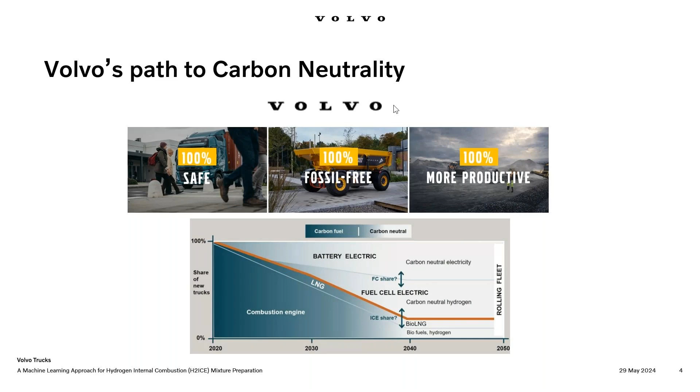So the big question, why ML in simulation? As I said, we have to be competitive considering the lead time to market. Now we are talking about new technologies, not just hydrogen. We are talking about ammonia. We talk about methanol. So this combustion is new, though the engine is the same. The combustion is new in all these fuels.

And with new technology, this poses a challenge as the unknowns are more. So in order to have a better understanding, we need to auto-generate as many designs as possible. And of course, our intention is not to replace simulations, but rather to have optimization design in product development just by replacing the redesign or the iteration aspect. That's the whole idea of doing such an activity.

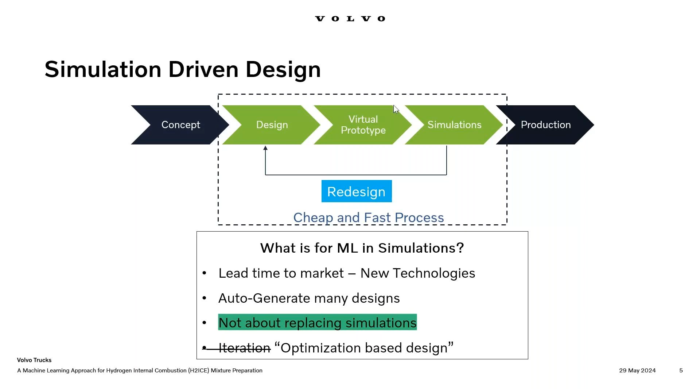Now coming to the objectives. First, we need to validate the engine image data in the form of velocity, that is PIV, and H2 mole fraction, that is in the form of PLIF, using simulations. The next aspect would be we need to identify what are the parameters that affect the mixing.

Considering the dispersion and diffusion of hydrogen in the picture, we need to come up with computationally efficient simulations without compromising much on accuracy. I know those two terms will not go hand in hand, but that is something which we are trying to address here. And finally, we need to find out how machine learning can be used to maximize the mixing.

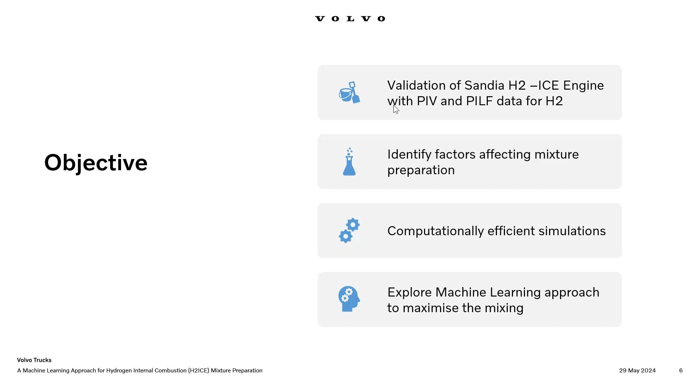So let's talk about the baseline validation. So we are considering the Sandia H2ICE engine data, which is published in the Sandia website. And this is of course a no combustion case that operates at 1500 RPM, roughly about 0.5 liter capacity. And this is the experimental arrangement on the right side where you can see a tumble plate to enhance the tumbling motion within the cylinder.

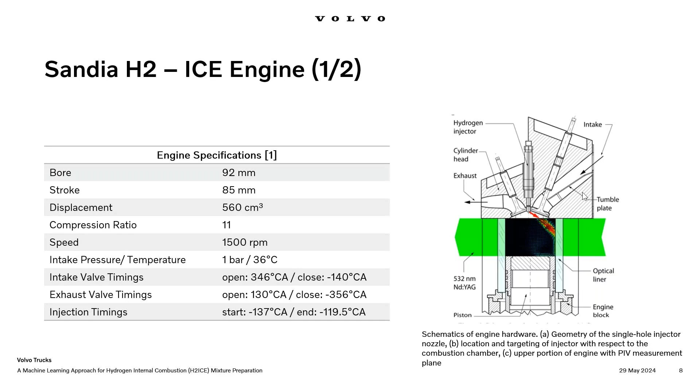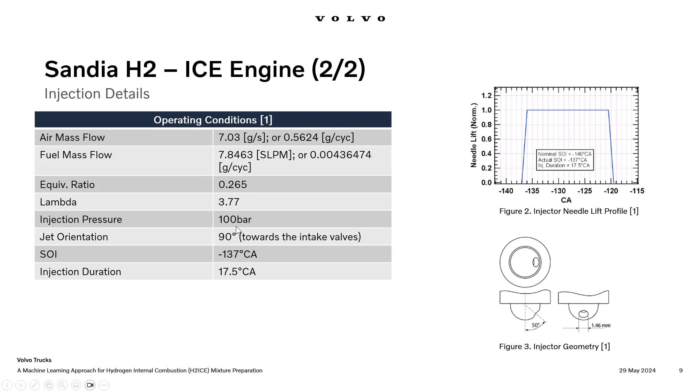And finally, at the bottom, you can see the injector geometry used for this present study. There is one interesting parameter we need to consider here. The injection pressure for this DI system is roughly about 100 bar.

So we have used the CAD information available in the Sandia website. And this study, what we are showcasing today, will consider a case with injection and tumble plate. The reason why I mentioned this is because there are many other cases published in the website. So we are only considering the extreme scenario where we consider tumble plate and injection.

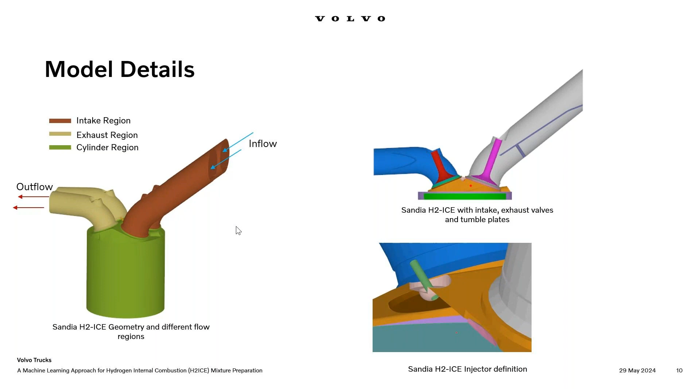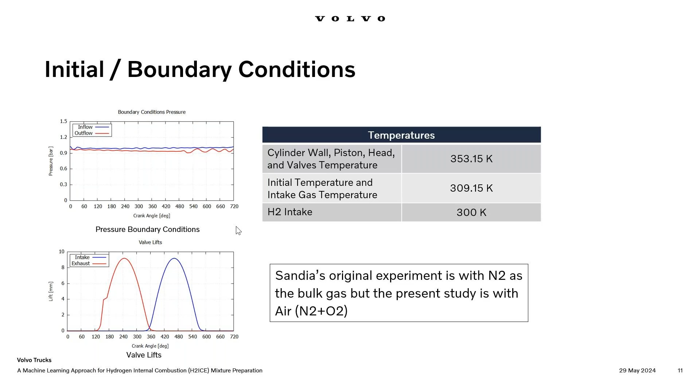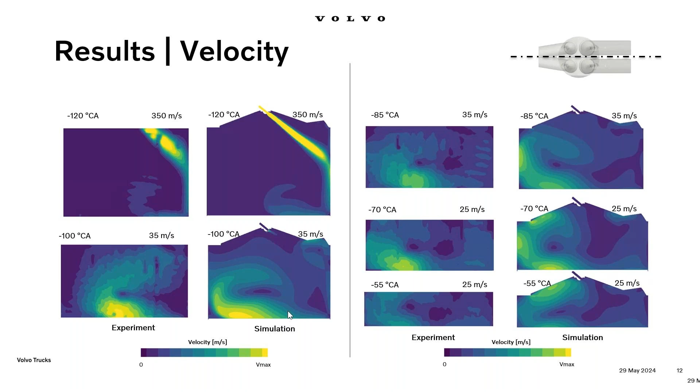We can see good agreement in jet penetration even after strong wall interactions. But as the crank angle progresses, you can see differences between experiments and simulation. And here again, we believe that the differences are due to the measurement uncertainties.

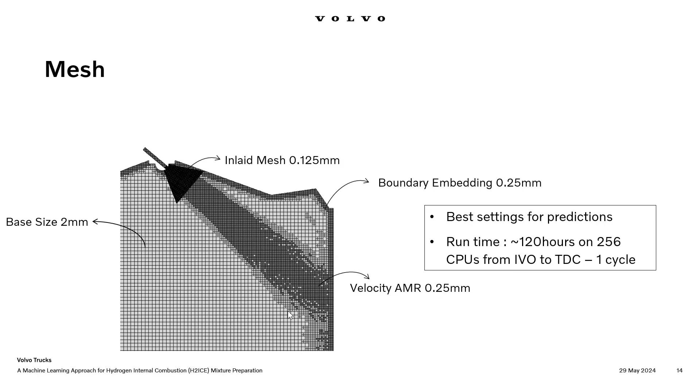But the downside here is it roughly takes about 120 hours to complete a simulation from intake valve opening to top dead center, not even combustion. And if you are talking about doing optimization on this particular case, it won't be computationally feasible. So we came up with another clever idea by coarsening the mesh.

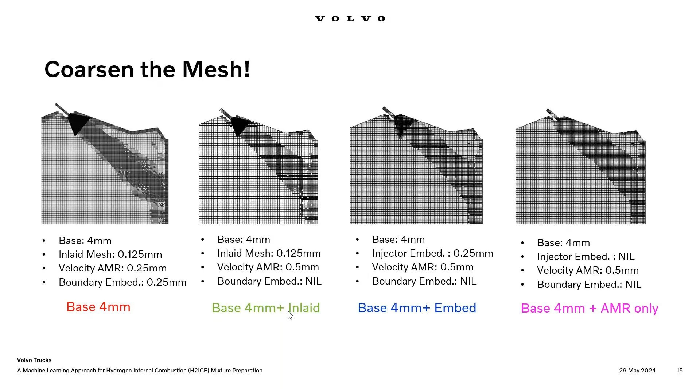So as we move from left to right, the mesh has been considerably coarsened. And we expect some numerical diffusion considering the fact that we are coarsening the mesh, but we also wanted to see how it is going to affect the bulk flow properties.

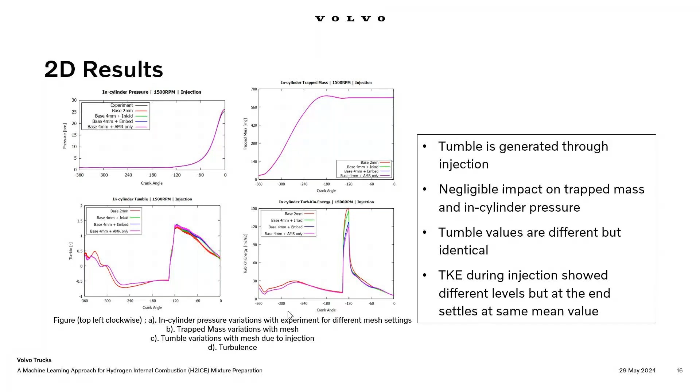On the other side, one interesting finding here, which is now apparent for all gaseous injection systems, is that the bulk flow after the injection is controlled by the injection parameters. So essentially what it means is that the tumble is generated through injection, which is an important finding when we were doing this work.

With that in mind, what we have done here is compare how our results vary if I am using the finest settings versus the coarser settings. And it's apparent that we are losing the details here, but considering the benefit we are getting with respect to runtime, roughly about 20 times, we decided to go with the base 4mm with AMR only settings.

So no inlaid mesh, no boundary embedding, anything. We are just going to resolve the flow using base 4mm and AMR.

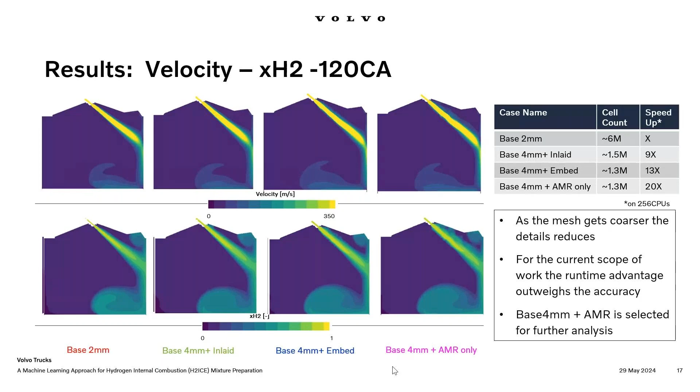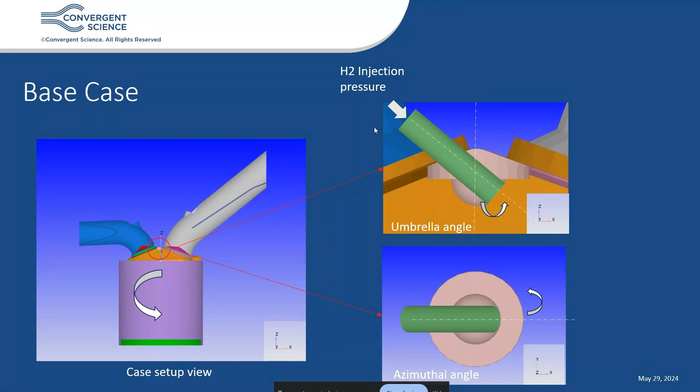So going to the next slide, for my design of experiments, I will be having three variables: the azimuthal angle, which we will be varying from 0 to 270, umbrella angle, this angle, which we will be varying from 25 degrees to 60, and the injection pressure. Like here, the H2 will be injected at different pressure, and the range will be between 20 to 80 bar. So if you see, I have three input variables, and all three input variables have their respective ranges.

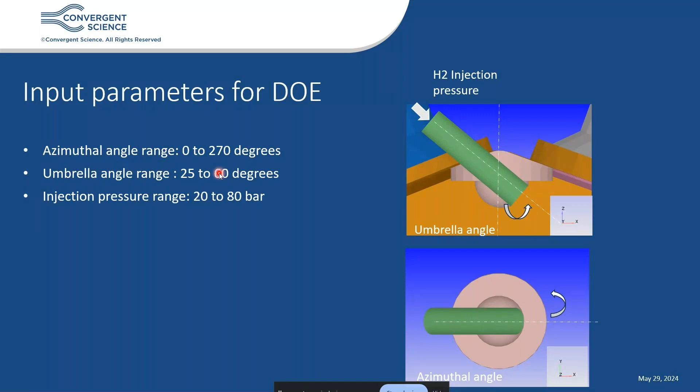Second is max tumble y. Now the y-axis is perpendicular to the screen. So if you see, currently the tumble is like this, and as Alan has explained in the validation, when hydrogen is injected, it itself creates a tumble, which kind of dominates the tumble created by the air. And turbulent kinetic energy at TDC, when the piston reaches TDC; generally our spark is either at TDC or at some inclined angle before TDC. So we will be measuring these three parameters as outputs for my design of experiments, which will be fed to my AI/ML model.

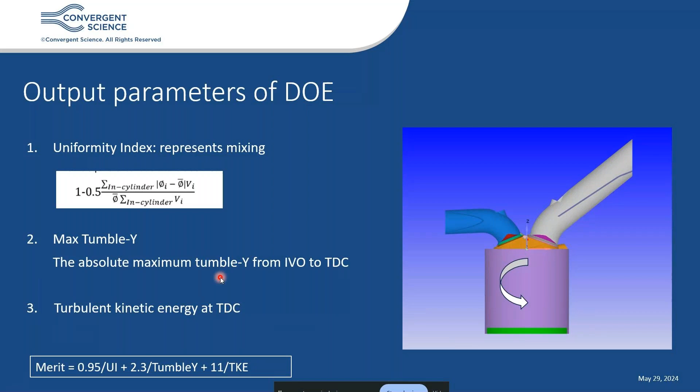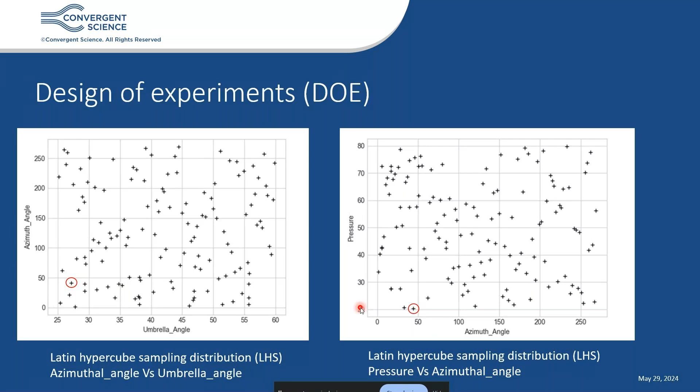So to give you one precise example, if you see this red circle, you can see here that umbrella angle is between 25 to 30, azimuthal angle is near to 50, and pressure is close to 20. And to be precise, the same point I'm representing by this case setup where we actually change our geometry by choosing the three variables. As I said, umbrella angle is 27. Azimuthal angle is 48. So if you see in the top view, with respect to the horizontal axis as well, the injector direction has changed. And in this particular case, I am injecting the hydrogen at 21 bar.

So summarizing it again, input variables are three: umbrella angle, azimuthal angle, and injection pressure. Output variables are also three: uniformity index, tumble y, and TKE. And we have a DOE of cases spread across the range of input variables, and we're going to measure these three values.

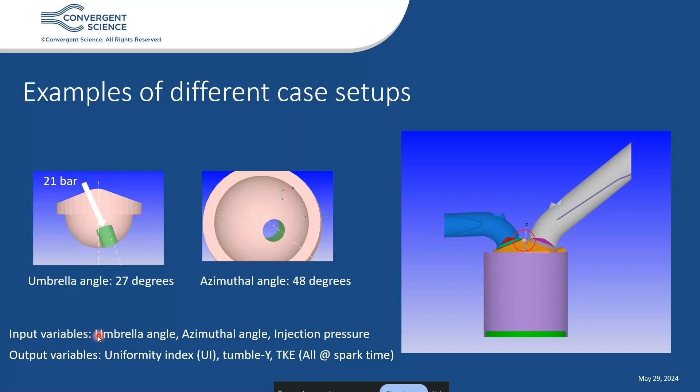So our entire DOE, which consists of 132 cases, which I just explained on the previous slides, we ran all of these cases on the Converge Horizon platform. What exactly is that? We partnered with Oracle Cloud Infrastructure to create a flexible, affordable cloud platform for Converge users, and you can run a number of simulations here in parallel in a very fast and secure environment. So if you're a Converge user, you can bring your own license and run it on our cloud, or even directly on Horizon if you can host a Converge license.

So in this particular project, the design of experiments consists of 132 simulations, and as Alan mentioned, one simulation takes approximately 6 hours. Now, all simulations can be run in parallel on Horizon. So theoretically, the entire DOE can be completed in 6 hours. Here I would like to reiterate the power of cloud computing, that all 132 simulations theoretically can be completed in 6 hours. But in our particular case, we completed it in 5 days because we wanted to consciously monitor our results in between.

Okay. So this is the important benefit of AI/ML models over the other optimizers where sequential simulations are required. For example, now I am going to generate the results of my 132 simulations in, let's say, 1 day, or, considering the practical limitations, in 3 to 4 days. And in 3 to 4 days, I can give all this data to the AI/ML model.

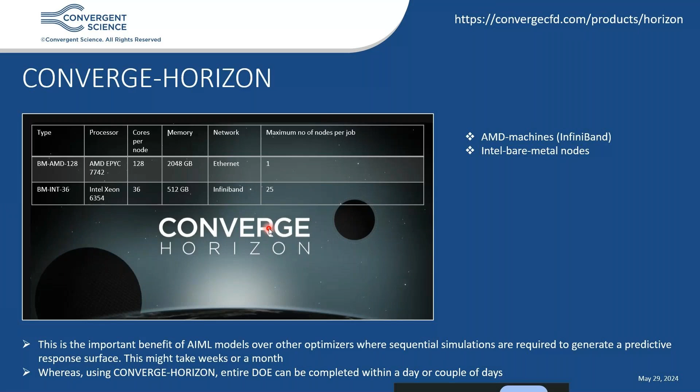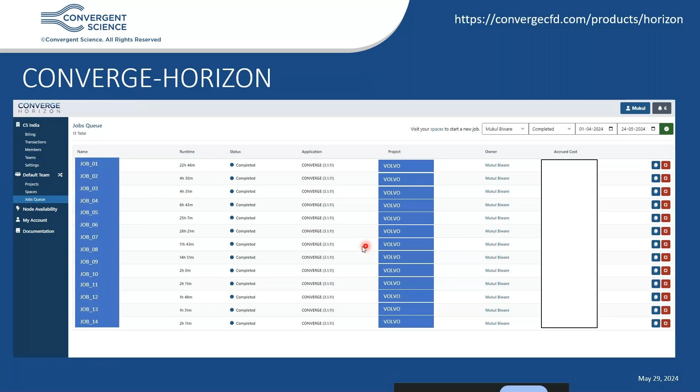Now this is just a sample screenshot. For this particular case, we ran multiple simulations. I'm just showing 14 here for now. We ran all these simulations in parallel. You can see runtime, monitor simulations, and see the cost, how much it is costing. You can see it on the fly.

Now, all this data that we generate so quickly in a couple of days, we feed it to the machine learning model. And this will be the next part of our webinar, and I would request Dan Probst to take over after this. All right, thanks, Mukul.

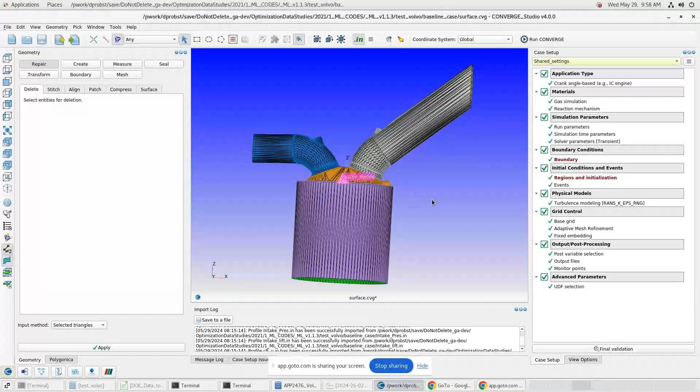So now for the next part of the webinar this morning, I'm just going to show a preview of this machine learning tool in CONVERGE Studio that we've been developing. For the work last year that was in the paper, we used some standalone tools, but now we've been working on implementing this into Studio. Right now I have our baseline case opened, and this is the same engine geometry that Alen has shown.

Now what we're going to do is open this tool to create this workflow for the machine learning optimization. We start in the first panel to generate cases. In this panel, we can create the variables that we're going to vary in our DOE. In this case, we had pressure, azimuth angle, and umbrella angle.

In this case, these parameters are not directly parameters in the CONVERGE case setup. If we were trying to vary a parameter that was directly in the CONVERGE setup, we could use a variable from this predefined list, which actually goes into the case setup. But for this case, as we described earlier, we're using these three variables that, through a Studio script, set up each case.

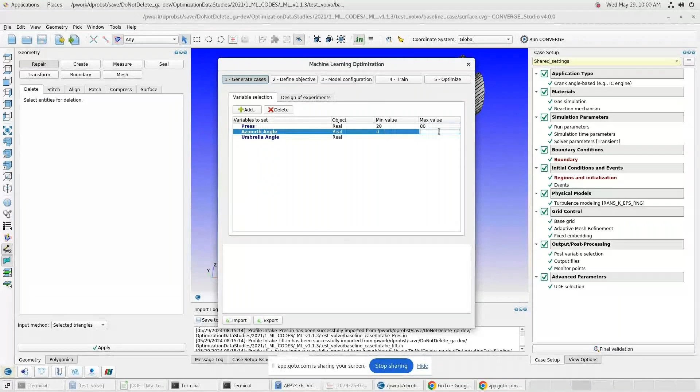Now for these parameters, the pressure, I'm going to put in the min and the max that we decided to vary in the DOE. Then move over to the design of experiments. You can pick a number of runs and then generate cases here. This uses a Latin hypercube strategy to sample your design space between the min and the max for the variables that you've specified.

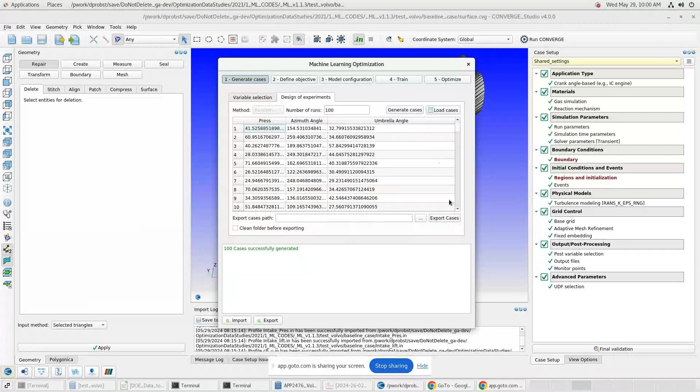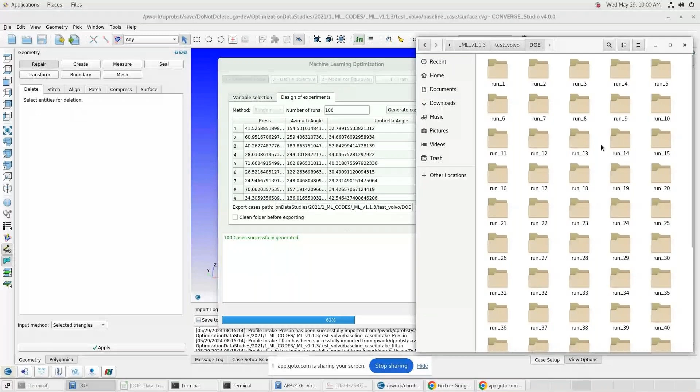Once this DOE is created, you can select a directory and export all of these cases. What you're seeing now is the run folder being created for every one of these cases with the different values of our parameters. If these were in the case setup, they would be directly changed in each folder. In this setup, we're actually using the Studio scripting. This takes a minute just to write the files.

But once all the folders are created, these could be zipped up and put onto Horizon to run them, or they could be run with a script locally.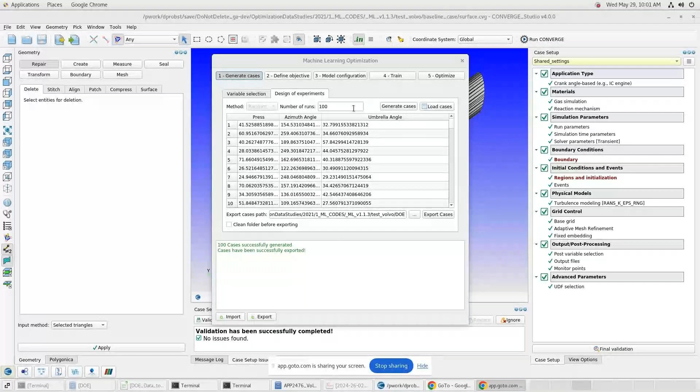So at this point in the workflow, you would pause, run all the cases, and then we come back and collect the results.

Now in the case of this study today, we actually already have a DOE that we generated. So we're going to copy and paste this DOE in, because it's really important that you have the same DOE for your input features as your results.

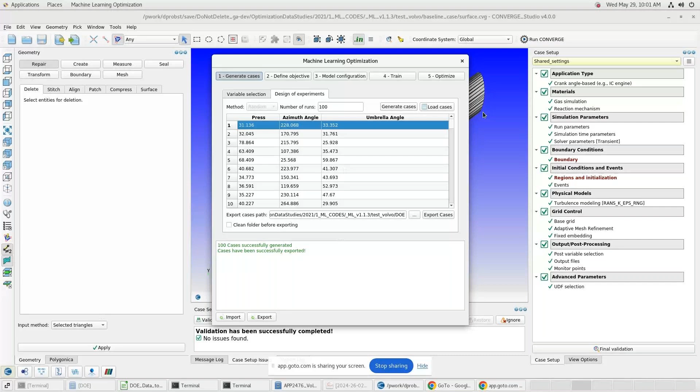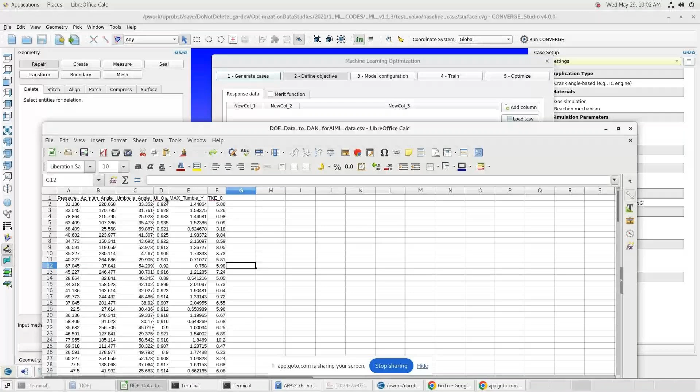So now we've loaded that DOE, and we move on to the next step, which is to bring in our variables, which we're here calling our responses. These are our results. And as Alen and Mukul described, we have three variables: a uniformity index, the max tumble, and TKE at TDC. So we're just going to rename these quickly to the variable names.

And then we can load in our results. In this case, I'm just going to copy and paste them in. And getting these results from Converge is pretty straightforward. Sometimes we'll write a UDF to calculate some variables that are written at the end of the run. In this case, these could be grabbed from the standard .out files pretty easily using some scripting.

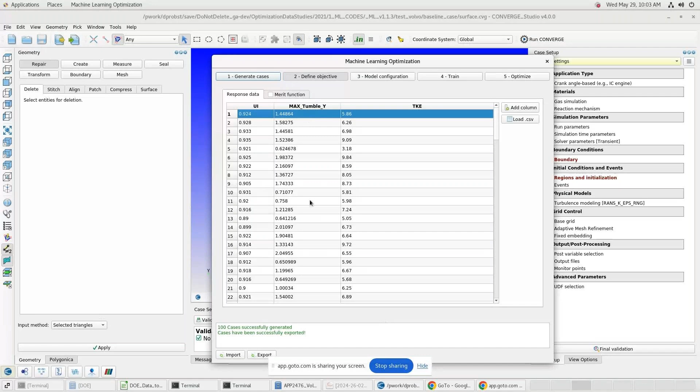And then we just get them in a file and we can copy and paste them in here. So now our results are put in here. We're going to use an optimizer that looks at a merit function. So in this case, we define a merit as Mukul showed earlier in the slide.

So we have 3 variables to choose from. We're going to include all 3 in our merit function. In this case, we wanted all of our variables to be maximized. So we want the max tumble to be maximized, the TKE and the uniformity index to be maximized. And then using these same scaling values that we showed from the paper, we complete our merit functions.

So these are all what we call performance variables. We're trying to maximize them. We don't have any constraints. A typical constraint may be like an emission. You may have a constraint on the maximum NOx or something like that. But in this case, we're only trying to...

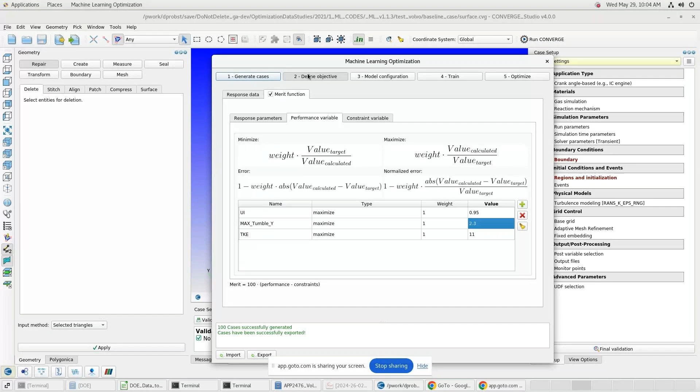maximize our 3 variables. So now we have our input features, our responses, and our merit function defined. So we can go on to define the model that we want to train. So we're training a machine learning model to emulate our CFD data, and then we can run the optimizer on that machine learning emulator.

So in the model configuration, this comes up with default recommended settings that are pretty good for a standard case like this. The kind of machine learning model we're using is called a super learner or a meta model, where we have a number of base models.

Each response is trained separately, and we can define separate machine learning models for each one. In this case, we just have our default where we're using all 5 available base models. We have a regression model, a random forest, an extreme gradient boosting model, support vector machine, and a neural network.

And then once all of these base models are trained and evaluated for their error in predicting our CFD data, they are combined with a meta model to maximize your accuracy. And then ultimately we have a single machine learning model to emulate the CFD for each of the 3 variables, and then we calculate the merit from those predicted variables.

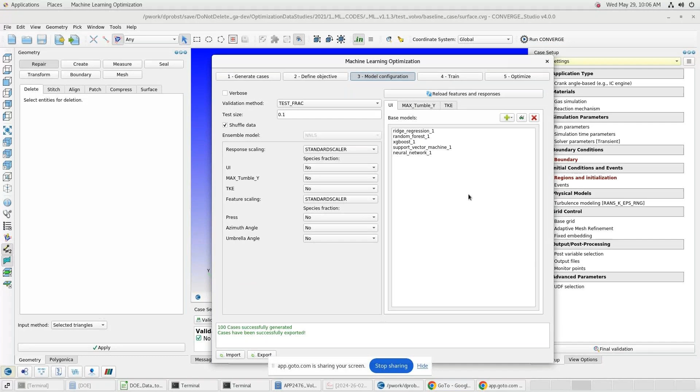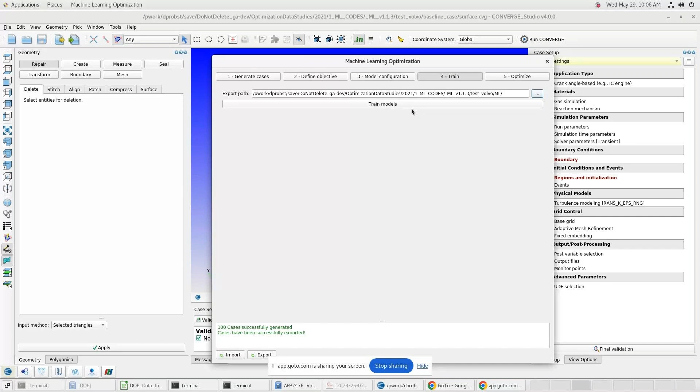So I'm just going to stick with those defaults. It's not the exact same settings as the paper, but they're pretty good. I just need to define a directory where I'm going to export the machine learning model, because when we train the model, we save it at the end as a saved model. So it's basically like a reduced order model.

This, like I said, isn't exactly the same as the paper, but it's a pretty accurate model, and also does not take too long to train. We can increase the complexity of the machine learning model, but in this case, we actually get pretty good accuracy with just this basic fast model.

So we can look at both our training data set and our test data set. In this portion of the workflow, we're making sure our machine learning model is accurate enough, or is a good emulator for the CFD data. So we're reserving 10% of our test data runs for testing. So that means we didn't use them to train the machine learning at all. So typically your training data will match very well.

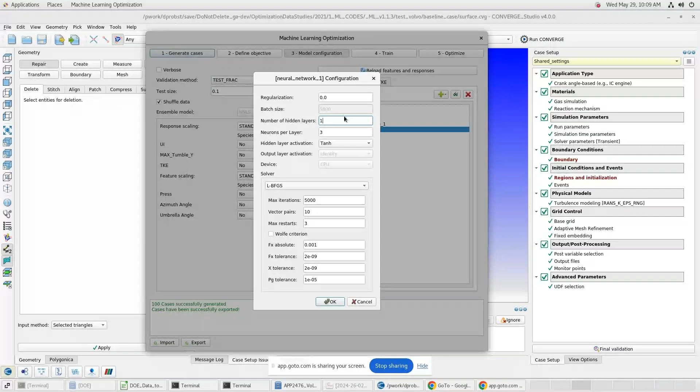Now at this point, we could go back and look at some of the hyperparameters for our machine learning models, and even adjust the parameters to change the complexity or the regularization of them, or other things like that. But in this case, our accuracy is pretty good and we have a pretty fast model, so I don't really feel like we have to do that at this point. But all the parameters to these base models are available if you go into the settings for each model.

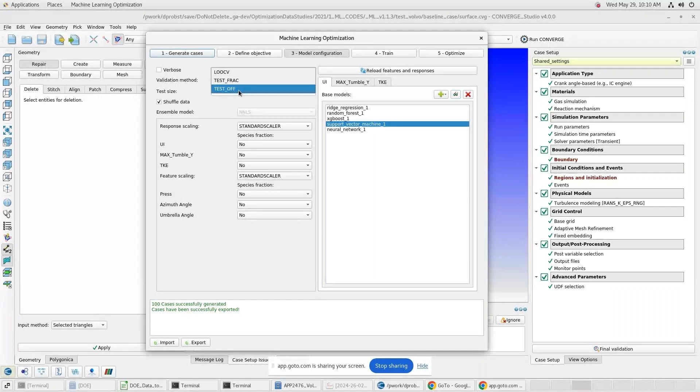So at this point in the workflow, we're ready to go on to the optimization, but I'm just going to retrain the model with the testing turned off first. The reason I want to do that is because we like the settings for the machine learning models, we like the accuracy of the machine learning models, but for the optimization, we want to train on all of our data.

So we're going to train on 100% of the data, save our machine learning model. In this case, you see that the test data disappeared. I can go back and look at the training data, but that isn't terribly important to us.

There's one thing I forgot to mention, and I'm just going to go here and do this quick - I forgot to show the merit. So I'm just going to train this quick with the test fraction again and show that merit, because that's ultimately what we're going to be optimizing on.

So here I've retrained with the test data withheld, and I'm just going to show the merit. We take those 3 predicted variables and we calculate our merit. Now this is showing our 10% test data for the predicted merit function. And this is ultimately what's really important for optimization - that we do a good job of predicting the merit for each data point. You can see it falls pretty well along that one-to-one line.

In this case, we're trying to maximize our merit because that will maximize all 3 of those underlying variables. You can see that we have good accuracy, with some points out there at the maximum merit. All right, so now I'll just come back and turn off the test fraction, train this one more time, and then we'll go over into the optimization step.

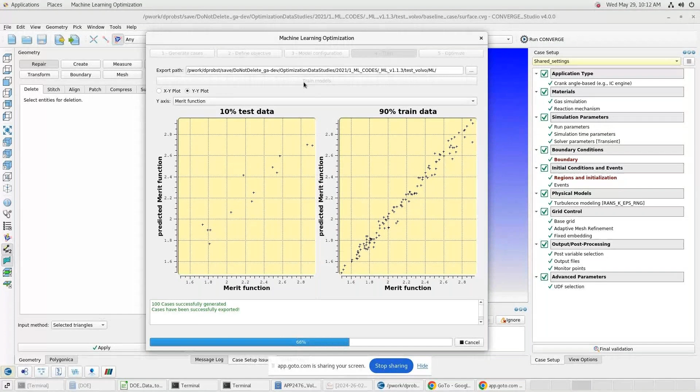Okay, so now we have our optimization panel. We automatically populate our 3 variables.

We by default put in the min and the max values of the DOE for our optimization ranges. So this is saying we're going to try to optimize this design space within these min and max values that we originally ran the DOE. Now we don't let this go beyond the min and the max, because with a machine learning model, if you go outside the data where it's been trained, you will really get garbage results.

So you want to stay within the definition of the DOE, but you could restrict this further if you wanted to during the optimization. In some cases, that may help you optimize the search space a little better. But in this case, we're just going to leave them to the full extent of the DOE and hit optimize.

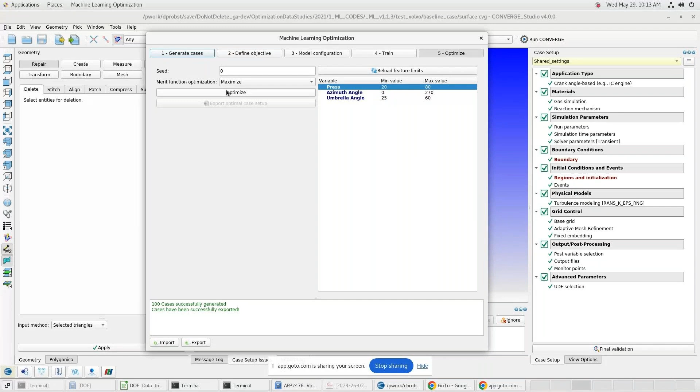And now we run an optimizer on the machine learning model. You can see we ran a bunch of evaluations and got to the point where the tolerances was reached, and we are predicting now an optimum of our machine learning emulator.

And you can see on this plot now we're showing all of our original DOE points in the black circles, as well as our predicted optimum in the red cross. So that optimum is predicted to happen with a pressure of 63, an azimuth angle of 181, and an umbrella angle of a little over 41.

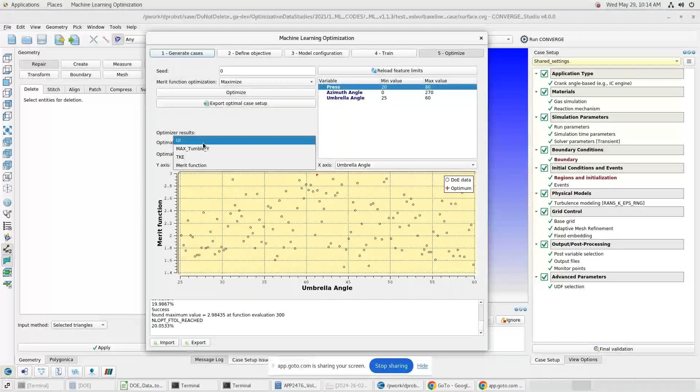And this is showing the optimized merit function. Now, if we go to each of the individual variables, we also have a predicted max tumble. You can see where it falls versus azimuth angle. You can see where it falls versus pressure. We can also look at the uniformity index.

Now, this is one interesting thing. Here, our optimum uniformity index against pressure is lower than some of the other DOE points, but that's because we're optimizing all three of these output responses at a single setting for all three of our input features. So the uniformity may not be higher than all the DOE cases, and some of these other, like TKE, may not be higher than a couple of the other DOE points. But overall, our optimum is predicted to be better than any of the DOE points.

So now at this point, we want to confirm this with CFD so we can export an optimal case setup using these three values of pressure, azimuth, and umbrella angle. We can hit this button, create a run folder, upload that to Horizon, run it, extract our CFD predictions for our responses, our uniformity, TKE, and tumble, and then see if that actually is an optimum.

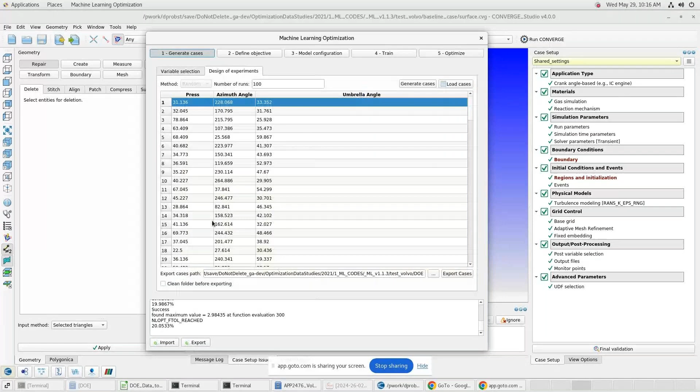In some cases, you may want to iterate this a few times. So in that case, you could take this predicted optimum, tag it on at the end of your DOE, take the result for those three responses for that case and tag it on here, and then retrain a model with that added data point and re-optimize it. And what that would do is it would take that predicted optimum, refine your search space in that really important area and retrain a model, and perhaps iterate a few times to get a slightly better optimum as you're narrowing it down in that very close area to the global optimum.

So with that, I finished this walkthrough of this tool we've been developing, and I'm going to hand it back to Alen for the conclusions.

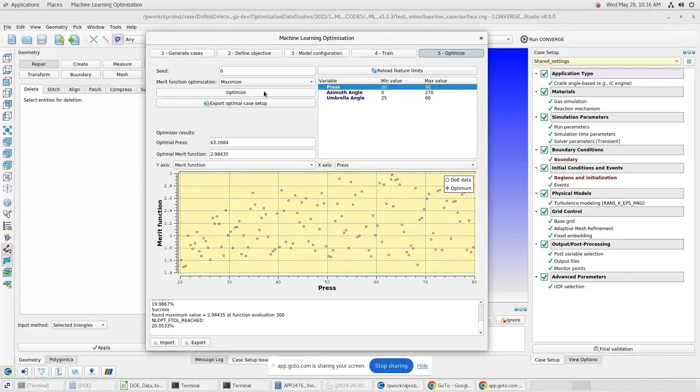That being said, this is something really interesting. So as I mentioned earlier, the Sandia case had an injection pressure of 100 bar. So if you expect that the injection can create the tumble, then naturally it is expected to have the best mixing with a higher injection pressure. Whereas when we did optimization, what we found out was instead of getting the best mixing at 100 bar, we are getting roughly about 60-65 bar respectively, which is why such studies are important when we are developing something new rather than trying with iterations.

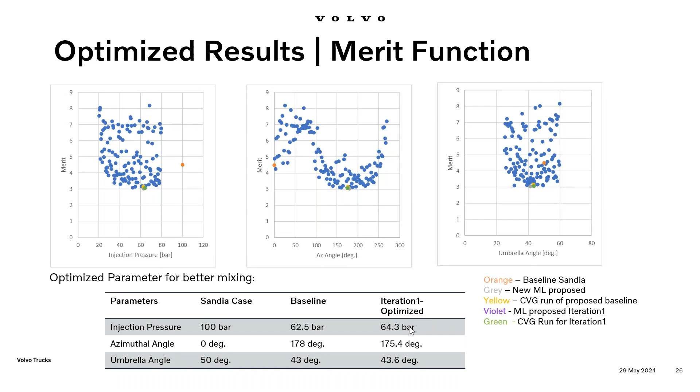So now here the graph shows what were our base values and what are the optimized values. You can see a clear improvement in tumble and TKE along with marginal improvements in UI, which we did through machine learning. So we are proving a point that if we are using this approach with a cloud-based and a DOE environment, then definitely you can optimize these injection related parameters.

For example, now for hydrogen, the cap design is something really critical. And if you're not sure on what approach you should take, like single hole, multi-hole, or what could be the shape, what could be the volume of the cap, you can use this approach here. And that is going to benefit you because the more data that you generate systematically, the more data you have for your machine learning model and then for optimization.

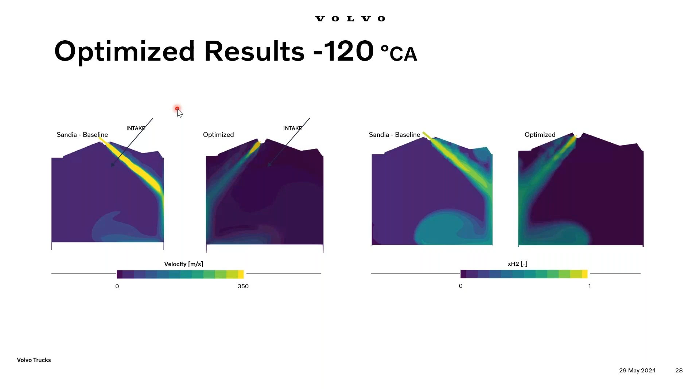Then finally, the conclusions. So we found out that the dominant charge motion is through injection, which is fairly important in this case here because of hydrogen. And then we did a rapid optimization. So we validated the model, made the model run faster, and then we made an optimization within 5 days. So the conventional approach to improve in-cylinder motion involves modifying the design of an intake port. But here, since the injection generates the charge motion, we concentrated fairly on the injection aspect of it.

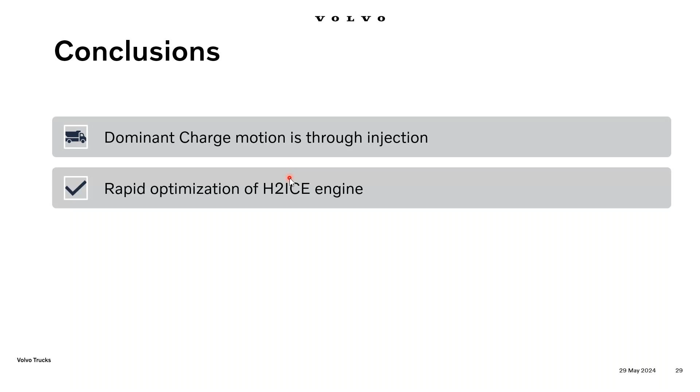And if we are using the ML based optimization, it has a significant advantage as it allows for concurrent generation of data for all the data points within a day or two by utilizing a cloud-based HPC. This directly speeds up the virtual development process substantially, and it can overall bring down the development time. So as I mentioned earlier, we can realize the optimization design philosophy much faster in this.

Now assume that you don't have an HPC environment, no problem. What you should do is start with a smaller data set. Here we started with 132 cases, but maybe start with 20 cases, train the ML model, bring back the predictions, run Converge simulations. Maybe after doing a couple of iterations, I am sure that you will be able to reach the optimum number.

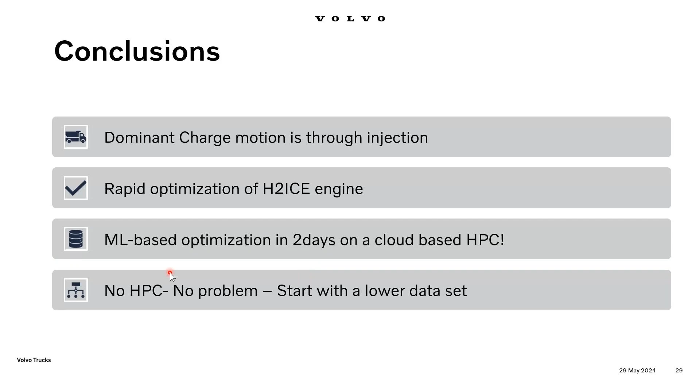So finally, what is the way forward? We already did optimization for multi-hole injectors as well, and we will be publishing this information soon. Then the next step is to do combustion on the same engine, where we will be using a similar approach to optimize the spark position. And finally, it's our wish that we will be using this methodology for the Volvo specific H2ICE engine for optimization. Since this method shows a huge potential in saving time for optimization, this can definitely help Volvo as a group in running simulations or getting results faster to get an optimum design.

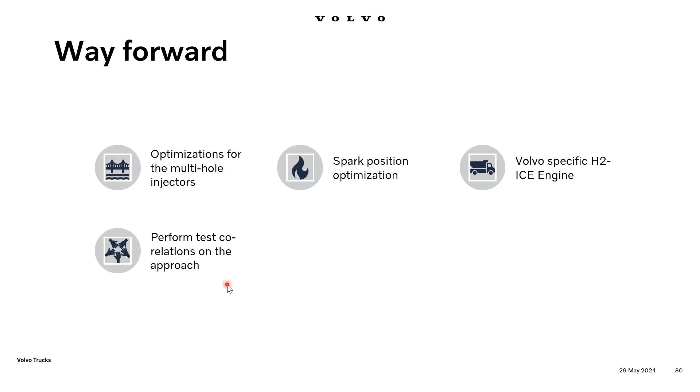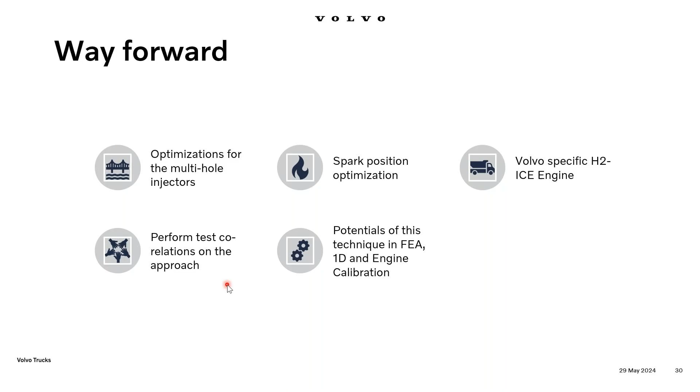And finally, I wanted to conclude by saying this. AI tools, whatever they be, give you superpowers, provided that you know your domain. If you don't, then there is no point in using these AI tools.